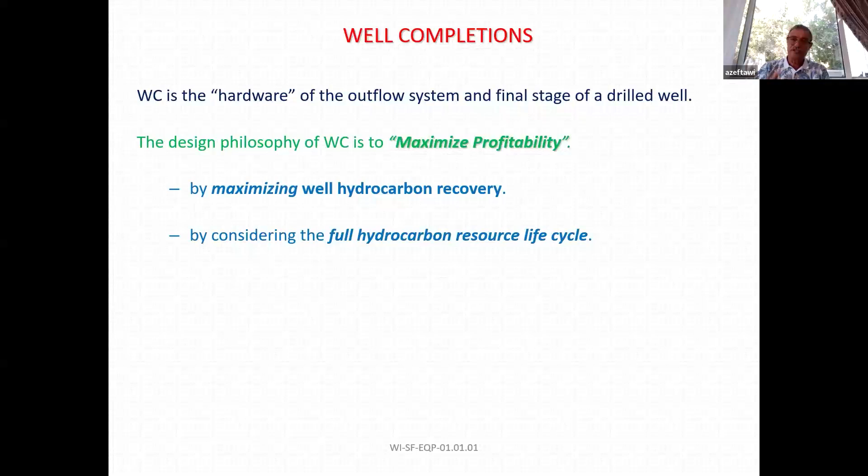And the philosophy of the well completion is to maximize profitability without compromising, of course, the safety and the environment. Why I say to maximize the profitability is because when you design the completion, you need to be sure that you are trying your best to get every single drop of hydrocarbons from deep in the reservoir all the way to the surface.

These hydrocarbons, while traveling from the reservoir, which might be 10,000, 15,000, 20,000 feet deep, all the way to the surface, ride a bus. The bus is the gas. The gas is the driving mechanism to drive these liquids all the way to the surface. So you have to be sure that the gas, which is deep in the well, while traveling all the way to the surface, is not traveling alone. He is carrying in his hands the oil that we need. If the gas comes out alone, you are a loser.

It ends up that maybe 70 or 80% of the reservoir still has oil, but you cannot get it. You need to go to what we call secondary recovery, or sometimes secondary recovery doesn't work. We go to what we call tertiary recovery.

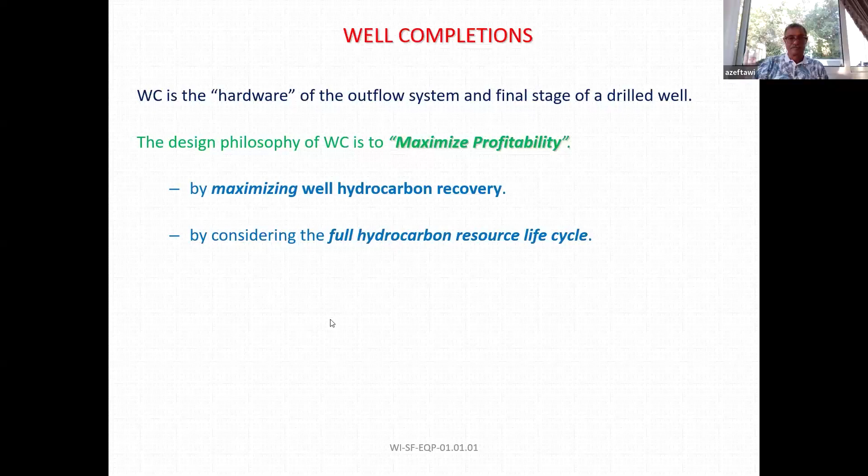What is the function of completion? All these are functions of completion. The main function of the completion is to produce hydrocarbon to surface or deliver injection fluid to formation. Sometimes we need to treat this formation with a special fluid, special treatment like acids or something. Then we do this through completion.

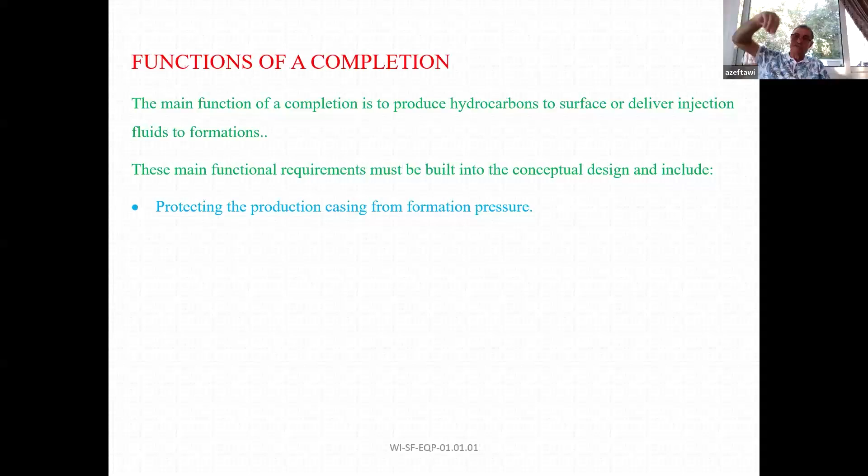These main function requirements must be built into the conceptual design and include protecting the production casing from formation pressure. That's why we have a packer. The packer is to isolate this upper part of casing from the hydrocarbons or from the treating fluid we are running through the completion. We are protecting our casing. Protecting the casing from corrosion attack by well fluids. Well fluid is corrosive, definitely.

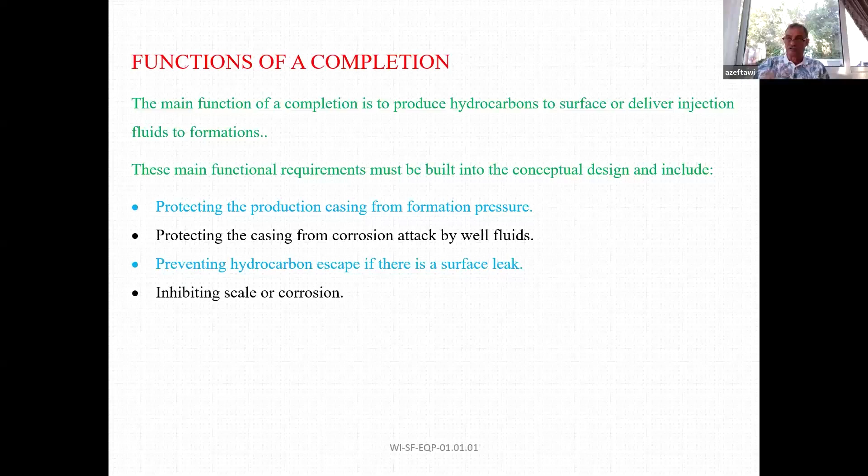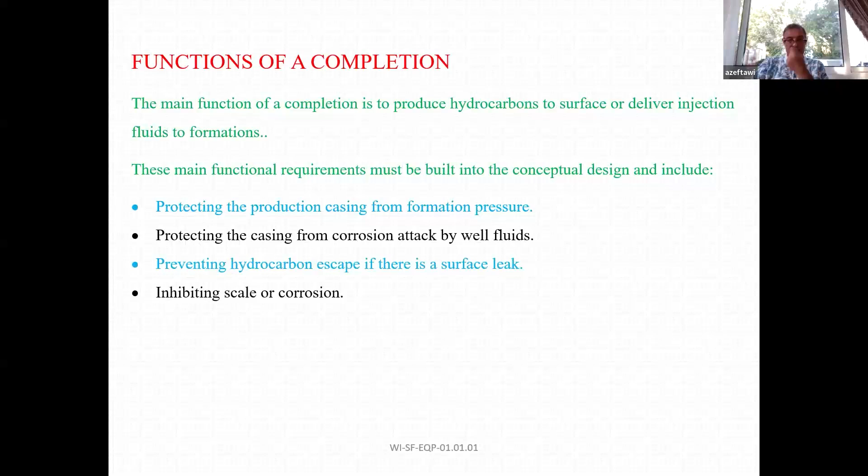Preventing the hydrocarbon escape to surface. We need a certain route for the hydrocarbons. The first day, we discussed the barrier envelope, that we need the hydrocarbons, from being in the reservoir, entering my well, all the way till it comes out, in a certain route. That's why we create this barrier envelope, so it will not make shortcuts. Producing single or multiple zones, perforating, stimulation, acidizing or fracturing. We do this through completion.

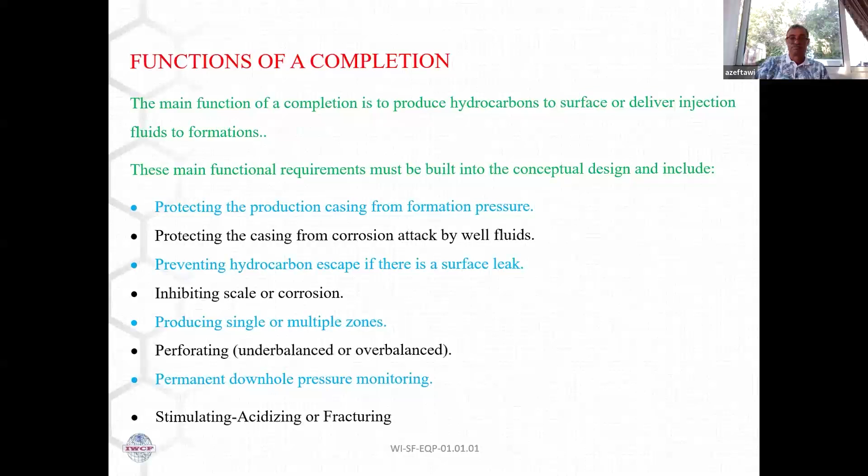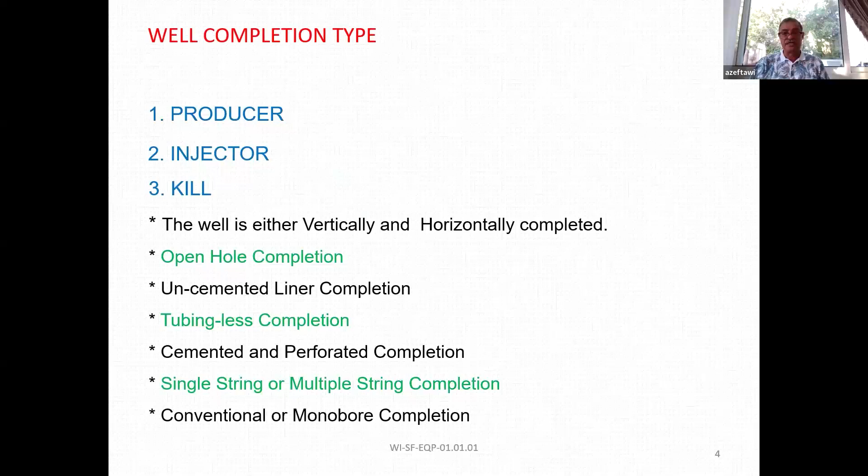Completion type: we mainly have three types of well. We have a well that we produce from. We have a well that we inject into, like water injection. Or a well we use to kill. We have kill wells. We sometimes drill a well to kill a well. And what you see in front of you are different types of completion. We have what we call open hole. We have slotted liner. We have gravel pack. We have cemented, cased, and perforated.

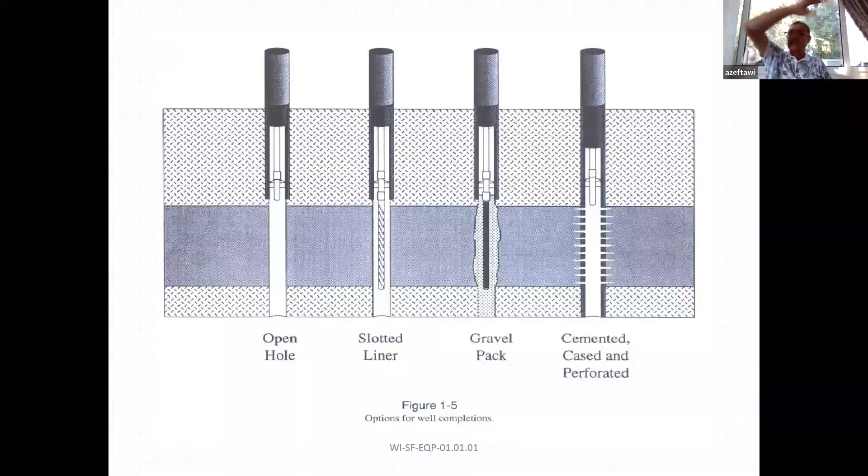While the slotted liner, we do it especially for sandstone formations, where when we produce, what comes out with the hydrocarbon is sand. This sand, when it comes with this high velocity, hits the tubing, and when it enters the production tubing, it eats it, it erodes it, with the surface pipe system as well. So to minimize this erosion and try to extend the life of this tubing, we put this slotted liner.

What is a slotted liner? It's a pipe like that, but it has a lot of slots all around there. So when the hydrocarbons come out of the reservoir, they hit this slotted liner. When the sand hits the pipe, the sand falls down, and what goes into these slots is the hydrocarbons. So it's a kind of filtration.

The same concept is the gravel pack. The gravel pack is where we put small stones. We take this from nature, actually, from water wells. So these small stones, we put them in front of the perforation. And then when hydrocarbons come out into my well, they hit these stones.

So the sand falls down, and what goes between the grains, these tiny roads between the grains, is the hydrocarbon. So a gravel pack and the slotted liner is a kind of filtration system we use to filter this sand, so as not to erode my pipe while traveling all the way to the surface.

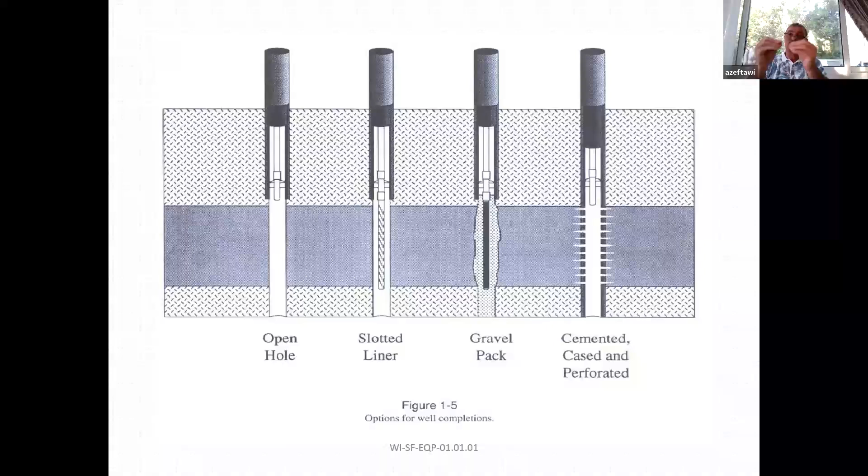And the last one, what we call cemented, cased, and perforated, is where we even have production. We have a tubing, we have a casing. This casing goes through the pay zone, and then we perforate. So hydrocarbons go from these holes, entering my well.

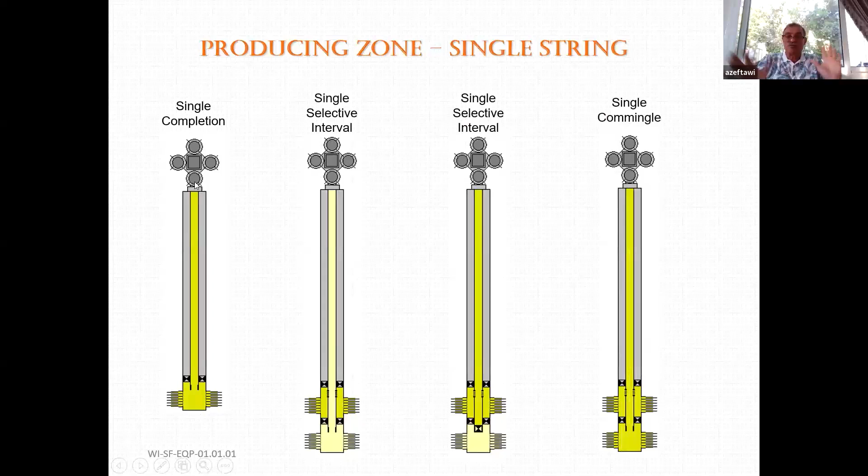We might have a single production zone. What you see here is a different type of single production zone. The first one you see here is a single completion. Single completion, we have one zone, one producing zone, and one single completion we produce from. The second one, we call it single selective interval, where we have two formations, but one completion.

In this example, we are producing from the lower zone. The following example, you are producing from the upper zone only, because if you notice on this production tubing at the end, we put a wireline plug and we open an SSD here, sliding side door. So we are producing from the upper zone through the SSD into the completion.

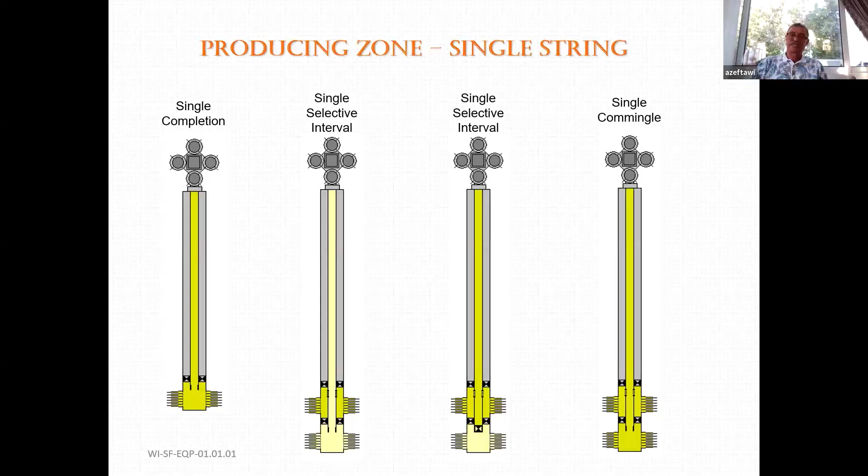Here, in this last example, we are producing from both zones. So no plug in the production tubing and the SSD is open. So we are producing from both zones at the same time. We use the same technique when we have multiple zones. This is the same technique.

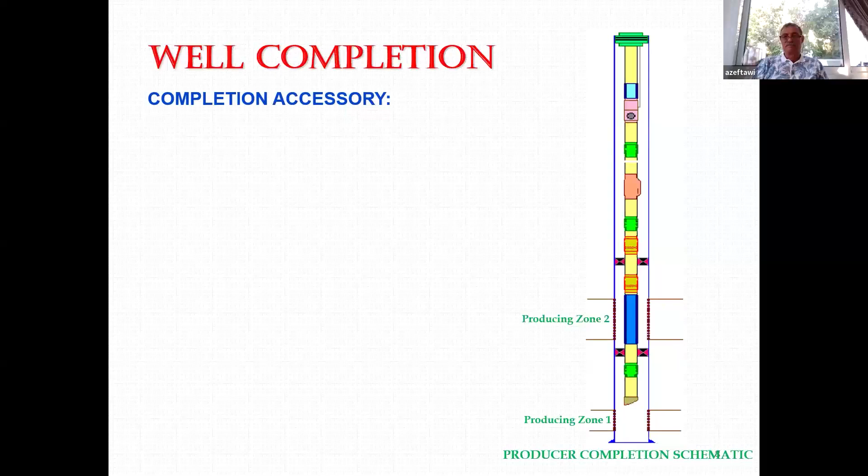When we run a completion, we run it with a lot of accessories. These accessories are these colorful things you see in this sketch. We put these devices into 5 groups based on the use of each one. For example, we have a group we call circulating device. In this circulating device group, we put everything we run into the completion for the purpose of circulation.

Can you tell me, guys, in this circulation device group, which devices I can put under this group that we run in the completion to give us the ability to circulate or communicate between the tubing and the annulus? I'm waiting for your answers if you have any.

Exactly. Some of you, I have a question: what is the space between the coil tubing and the tubing? This question was related to the 4.5-inch completion that I run, and we run 2 7/8. The clearance will be between the 2 7/8 and the 4.5. Maybe your choice is not 2 7/8, by the way. Maybe your choice will be 2 3/8 or 3.5. And the clearance will be between the two sizes, between 3.5 and 4.5, or 2 7/8 and 4.5.

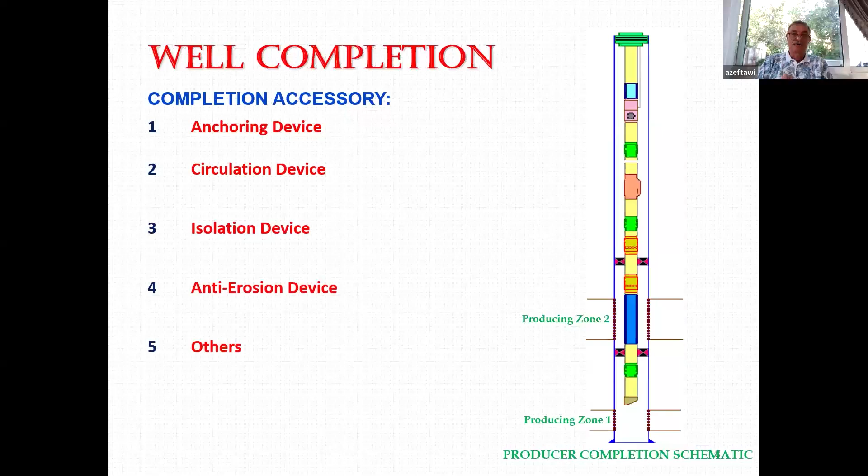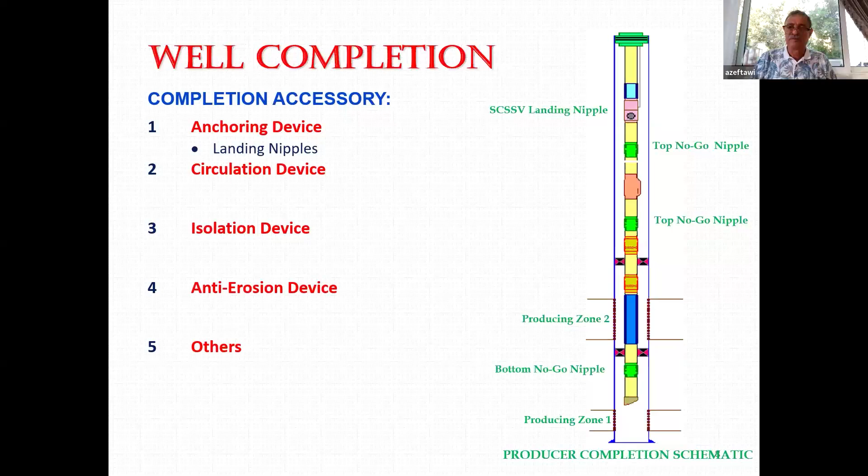So if we start from the beginning, anchoring device. Anchoring means it is a device to receive a flow control device, which I mentioned a while ago. This is the landing nipple. The main purpose of the landing nipple is to receive flow control devices. And in any completion, you might notice that we will have more than one landing nipple. Maybe two, maybe five, maybe seven. It depends on the design.

But don't misread what is written there, like here, top no-go nipple. People understand no-go to mean nothing will pass. So how, Ahmed, do you put a no-go nipple on the top of the completion, so nothing will pass? No, no-go actually means that anything will pass except its own device. The shoulder in the landing nipple will stop the device. Which device? Its own device, but everything else can pass. It is based on sizes. So the landing nipple is mainly to receive flow control devices.

And one day I was in one of the lectures, and I had this question for one of the guys, and the question was: "What is the main purpose of the landing nipple?" And he had to select one of four answers. He selected a statement saying that it is to correlate depth. And definitely he took zero on his question.

And then he started complaining that he has been working in wireline for the past 15 years, and he is using a landing nipple to correlate his depths. My answer to him was, I totally believe you. I know that. I did it myself. But this is not the main purpose of it. The landing nipple is doing the correlation of the depth as a favor to you, but this is not in her job description.

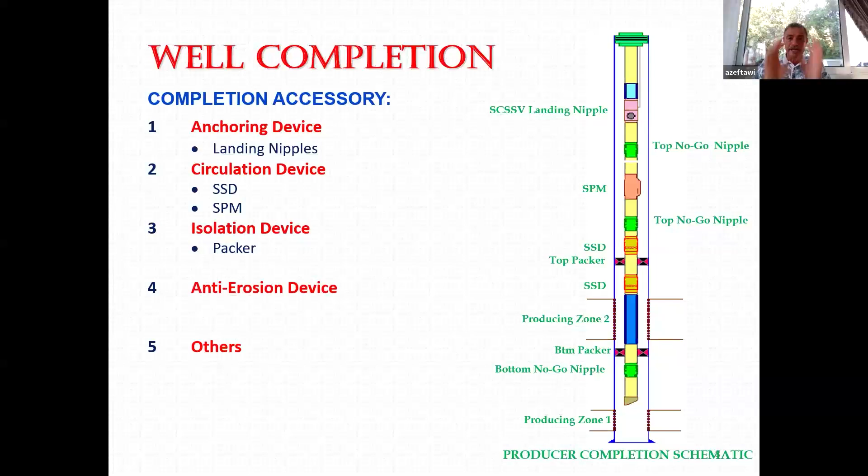But then in the exercise, I'll give you a question: what is the purpose of the packer? And if you select an answer saying that it hangs the bottom completion, I'll give you a big, big, big zero, because this is not the purpose of the packer. It does this as a favor for you, but this is not the main function. The main function of the packer is to isolate the upper part of the casing.

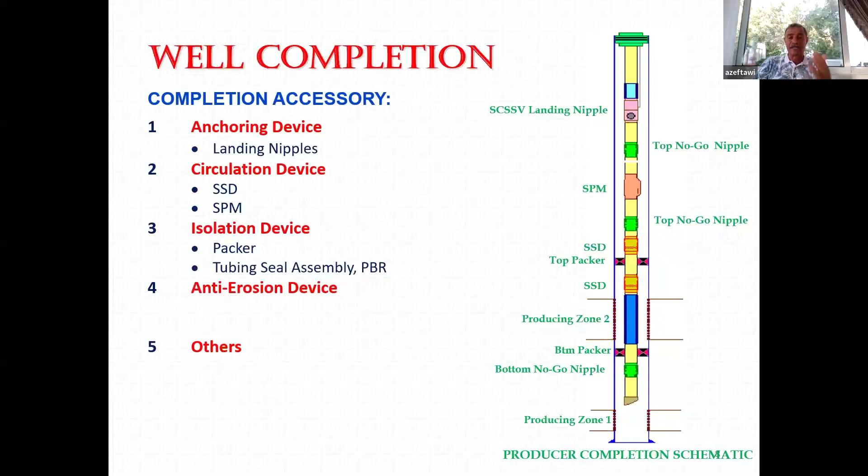We have some other devices which also isolate, like the tubing seal assembly and the PBR. The PBR stands for polished bore receptacle. By the way, each piece of equipment I mention now, we will talk about a little bit later on. But let us finish all of them, then we'll start talking about each one separately.

The anti-erosion devices, we have two: the blast joint and the flow coupling. The blast joint is this blue piece of pipe you see in front of the formation. What is its purpose? It is a pipe with the same idea as the tubing, but it has a bigger wall thickness.

If this were a normal pipe in front of the perforation, when you start producing from the well, the production with a lot of sand coming out erodes the outer surface of the tubing. After a few months, this part of the tubing will have a lot of holes.

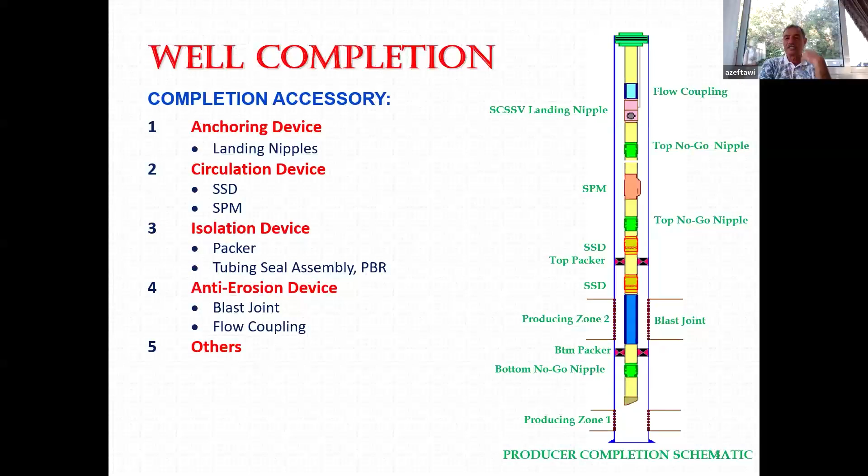So it's like a net now. What should you do now? Kill the well, bring a workover rig, pull the completion, change the damaged part, put a new one, run it back, which is a lot of waste of time, waste of money. So instead, from day one, we run this blast joint, which has a heavy wall thickness. So it will withstand these hits. It will last longer. If the normal one will withstand 6-7 months, it might stand 5-6 years.

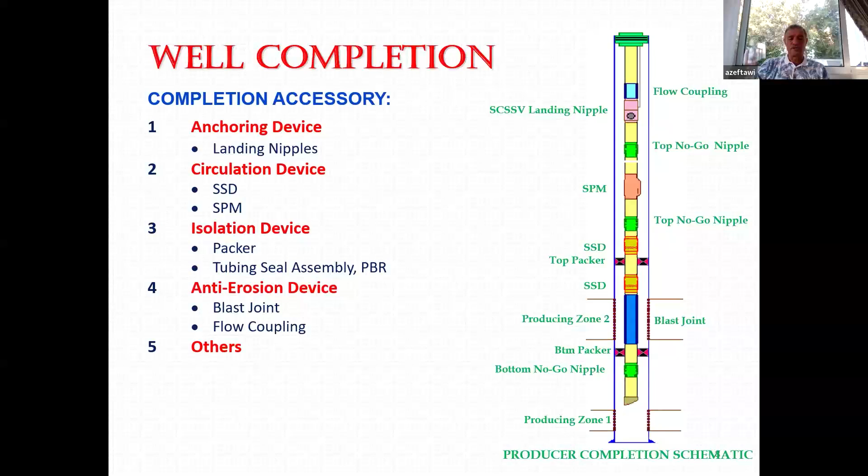And sometimes we do it, by the way, with the same thickness, but different material, like tungsten carbide or ceramic. This is the blast joint. So we have also a flow coupling. We'll talk about the flow coupling. The other pieces that we cannot classify into one of these groups are like a wireline entry guide, a perforated joint, a control line, and the tubing hanger.

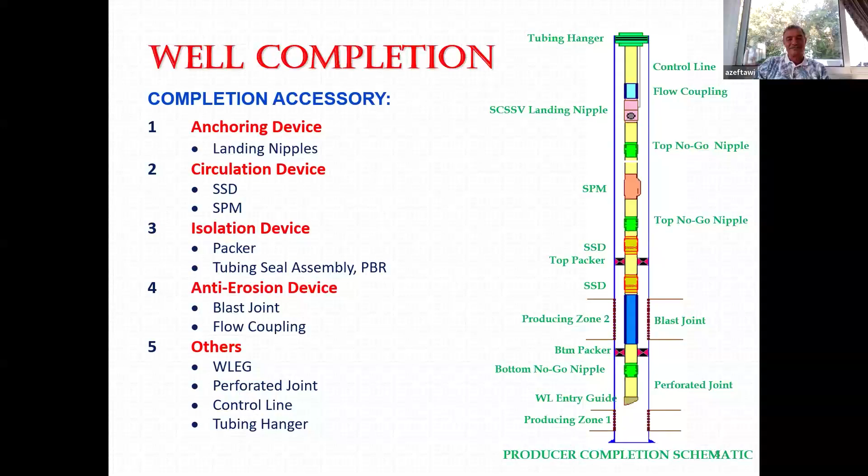In our mission, we need to talk about each piece or each accessory of these just a little bit to have a general knowledge. But before we talk about it, we need to discuss something very important. When we, as production people, receive a well from a drilling department, because once they drill the well, they hand it over to production so they can run a completion and produce from this well. You, as a production man, or production engineer, production supervisor.

When you receive this drilled well from a drilling engineer or drilling supervisor, the first thing to do with this well is to give it a shower. I'm joking, of course, but what I'm saying is you have to clean the well. Why? Because when you receive this well from a drilling department, it is full of rubbish. If you are at the surface and this is your drilled well, if you look down to see what's in the bottom, you'll see debris, scale, grease, tie wraps, ring gaskets, O-rings, just imagine all kinds of rubbish.

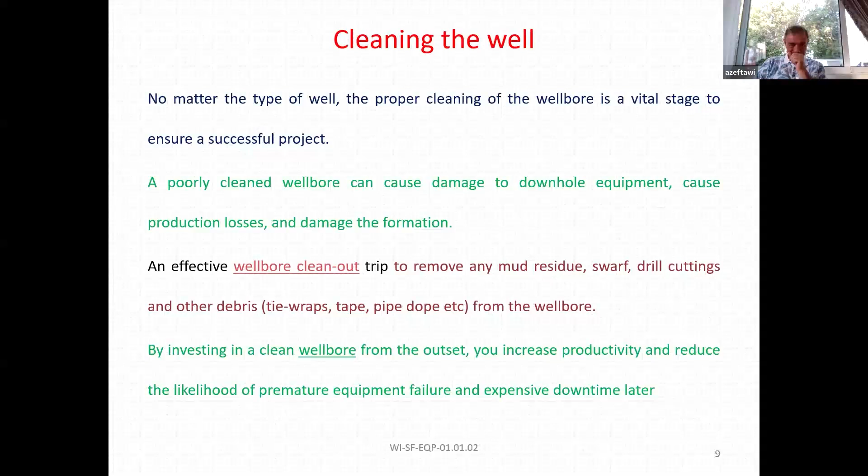So if you produce with this rubbish there, you're going to destroy your reservoir, you're going to destroy your completion, you're going to damage your surface facilities. So first thing when you receive a well from the drilling department, with all my respect to the drilling team, of course, please clean your well carefully to get rid of all this rubbish that they gave you with this drilled well. If you didn't clean it well, this is what we might get at the end: reservoir damage, equipment malfunction, incorrect gauge reading, incorrect barrier test results.

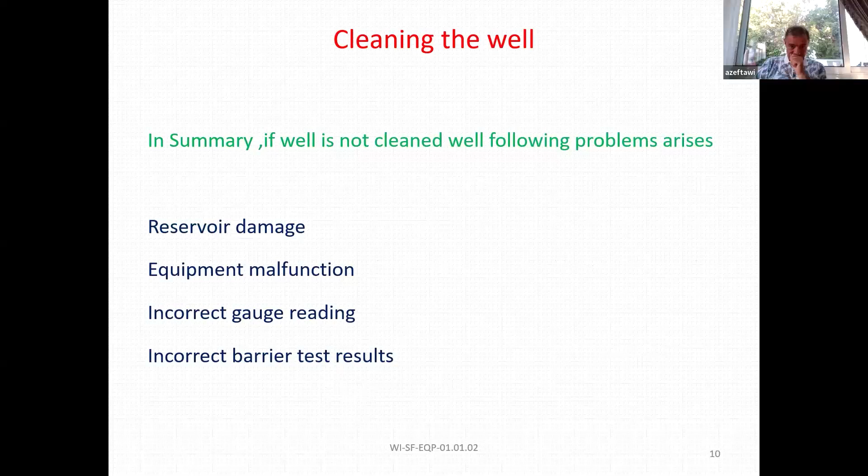The completion is two parts. One part is below the surface. The other part is above ground. What is above ground is the wellhead and the Christmas tree. For several years working in oil field industries, international well organizations, I was under the impression that both wellhead and Christmas tree have the same meaning. What is this? This is a wellhead or this is a Christmas tree. It's the same. Till I found out that I was wrong.

When I got the correct knowledge, I came to know that a wellhead is the components of tubing hanger, tubing head, casing hangers, casing heads, where on top of that, we put the Christmas tree. The Christmas tree is the group of valves that control the well flow. The connection between the Christmas tree and the wellhead, we call it THF, tubing head flange. And this tubing head flange is where we adjust our counter to zero while running coiled tubing or wireline. It is true that sometimes we refer to the whole thing as a wellhead, but engineering wise, the wellhead and Christmas tree are two different parts. The connection between them is the THF, tubing head flange.

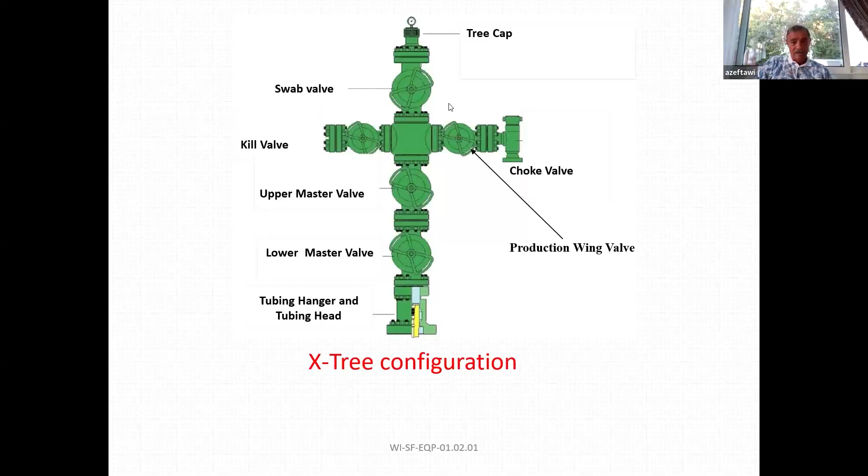Time is running, I don't believe I've been talking for an hour now.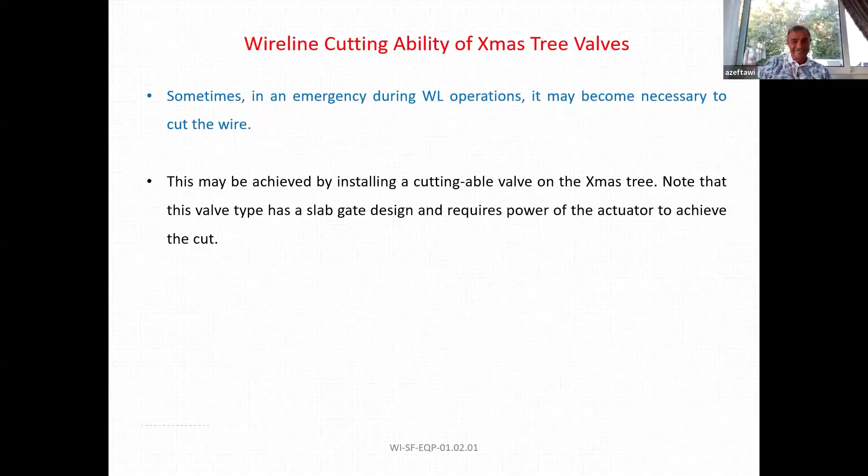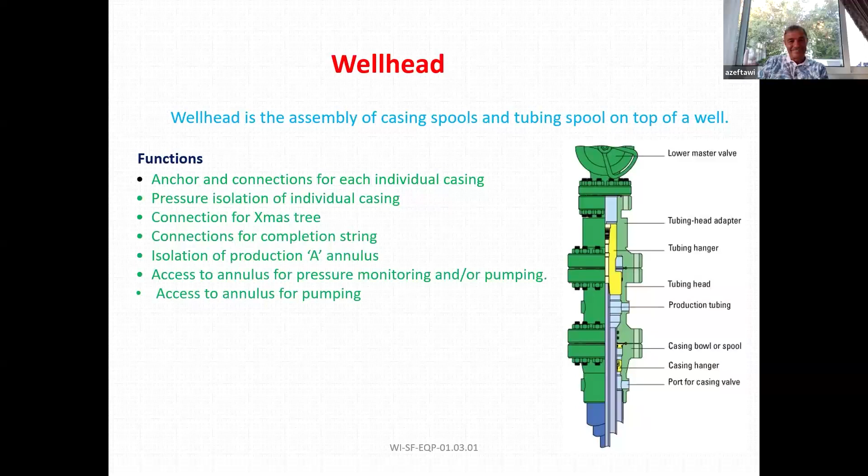I have to close my eyes and act like I'm blind, not reading this, so I skip these slides.

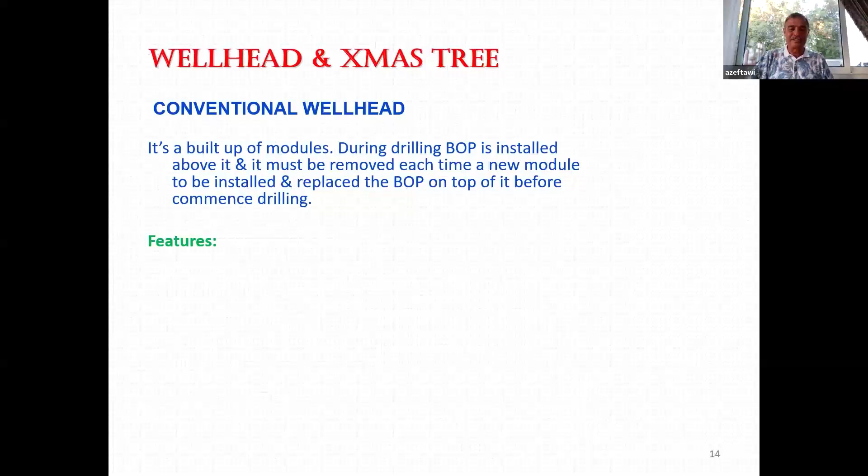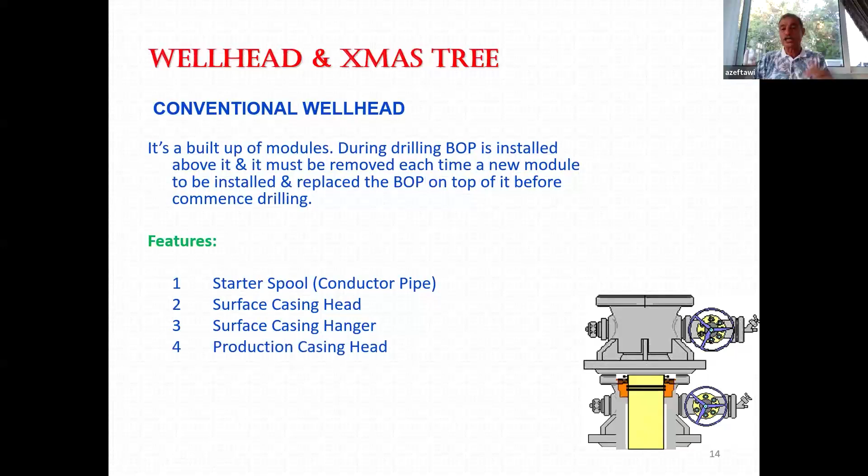When we talk about the wellhead, which is modular, when we start with a surface casing, you put a surface casing head, and inside it you put a surface casing hanger, shown in brown, which hangs the yellow surface casing. If you intend to run production casing after that, you put a production casing head on top, where you place a production casing hanger, hanging the green production casing. If you are running completion, then on top of that you put a production head, or tubing head, where you place a tubing hanger. This tubing hanger hangs the production tubing. And this is what we call the tubing head flange, where you put a Christmas tree on top.

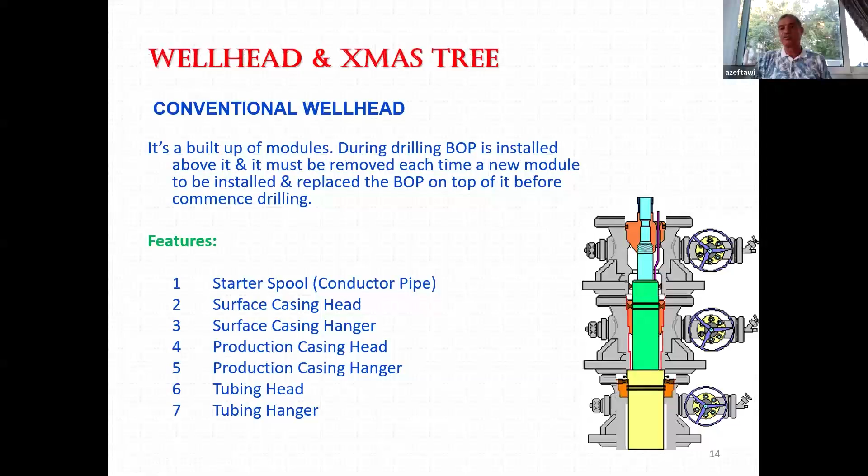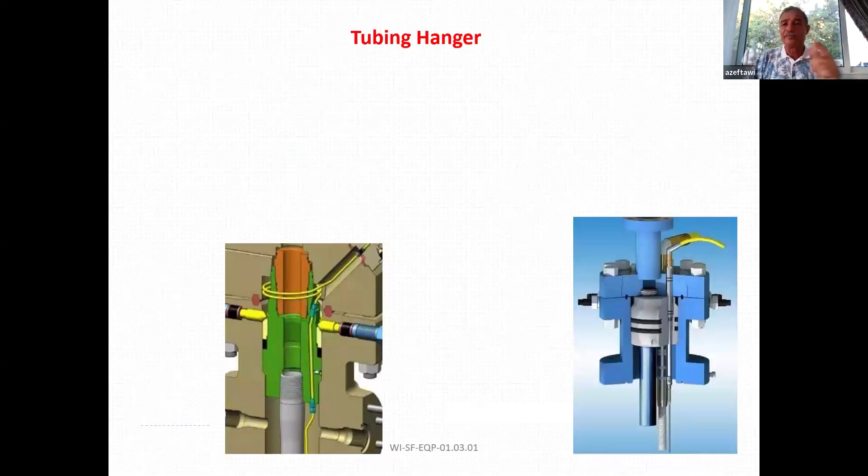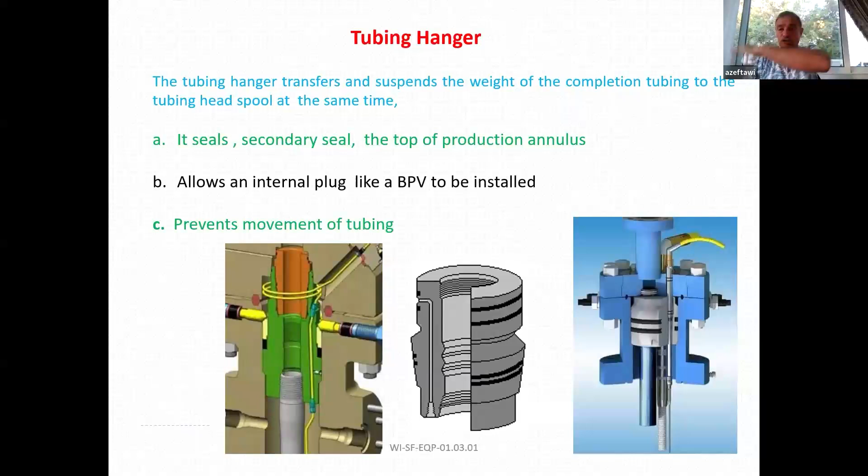A tubing hanger, as its name suggests, is to hang the production tubing. More precisely, it hangs the top completion only, because the bottom completion is hung by the packer. It also has a profile inside to fit what we call a BPV, back pressure valve. We use a back pressure valve as a barrier, sometimes needed to change the Christmas tree if it is damaged or leaking.

Maybe this is the last thing to discuss before we end today's session: how we select our production tubing. When we go to the supermarket to buy production tubing, we have to decide which type we buy.

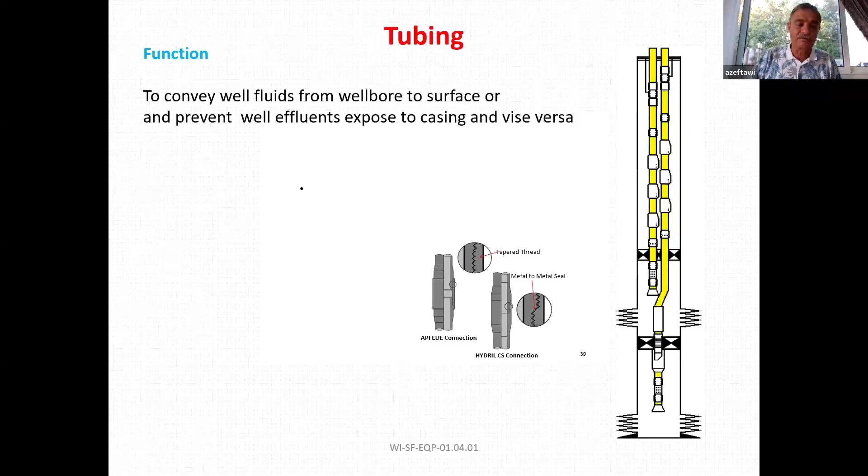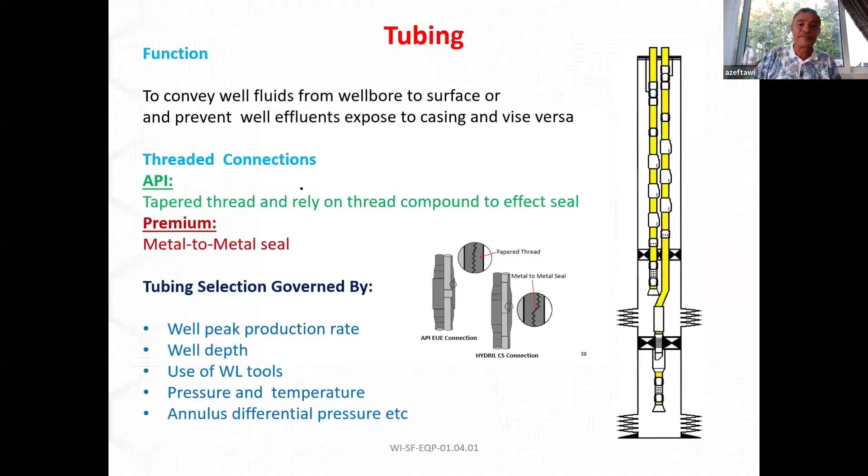Our selection is based on so many things: the production rate, the well depth, the use of your wireline tools, how you pass based on the pressure that can withstand, and the temperature, which can withstand high temperature, low temperature, high pressure, low pressure. It depends on the grade. That's why you select the grade of the material you are using.

On the tension you're going to apply, the burst limit of this tubing, the collapse resistance of this tubing, the compression that can withstand, the coupling that you are using, the corrosion - can it withstand the corrosion?

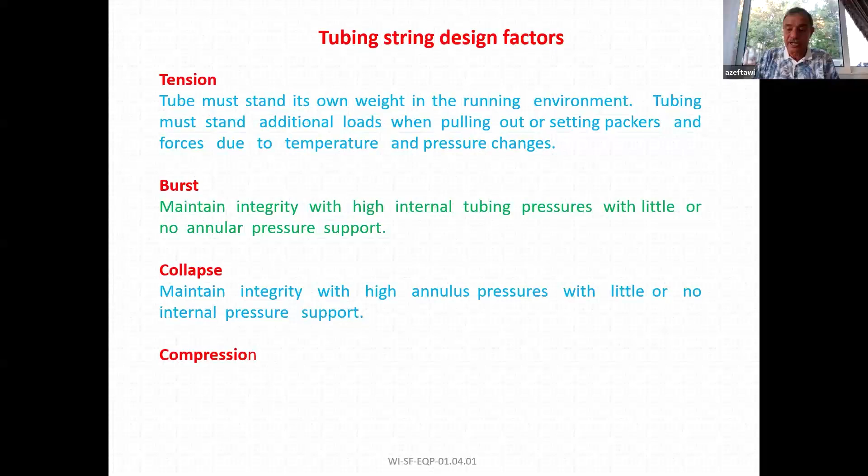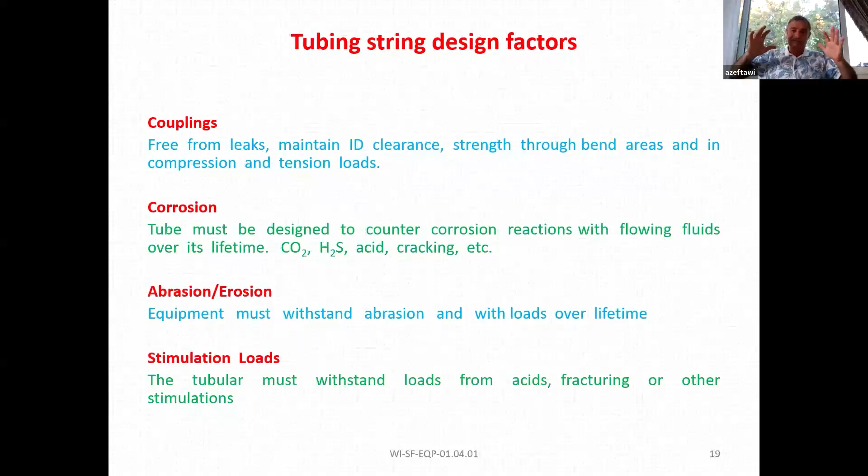That's why, for example, some completions we call 9 chrome. 9 chrome means it has 9% chrome. Some other completions are 13 chrome or 25 chrome. 25 means 25% chrome. Why chrome? Because chrome is to withstand the H2S and CO2, stimulation loads on that tubing, and erosion. So all these factors govern the way we're going to select which production tubing we are looking for.

For example, let us run completion to 15,000 feet. What holds the weight of the 15,000 feet of production tubing? At the surface, it is the tubing hanger. The tubing hanger is what holds the weight of the 15,000.

Please go below the tubing hanger. This part of the production tubing is hanging 14,999 feet of tubing weight. If it cannot withstand, the pipe will split. This is what we call the tensile strength of the pipe or the material. What is the tensile strength? In a very simple way, it is the ability of the pipe to withstand its own weight. Otherwise, it will elongate and split.

Oh, one hour passed quickly. I will stop here for today, and we'll continue Tuesday at 6:30. But before I leave, I need to see if you have any questions that I can answer.

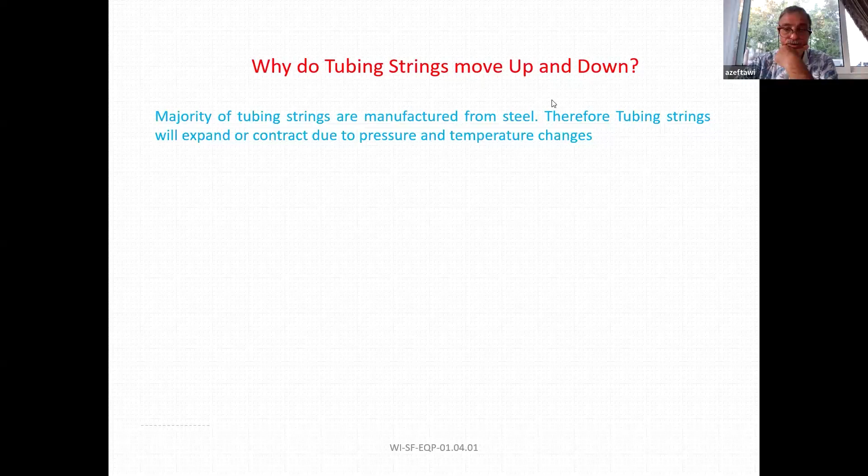This is all the questions I have, Dr. Ahmed. So, please advise me if I should leave or if you need me anymore. Thank you very much and have a wonderful day. When will we see you again? When is the next lecture?